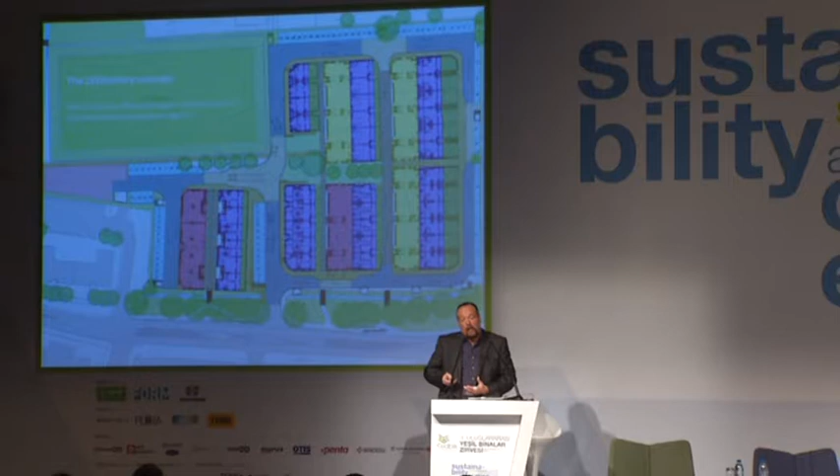We call this carbon trading in return for planning gain. So if it's possible to integrate low-carbon transportation, energy-efficient buildings, energy-efficient workplaces, and plug it into the existing city, you can get far more spectacular results than if you just concentrate on buildings or master planning alone. This is a view from the air of BedZed today.

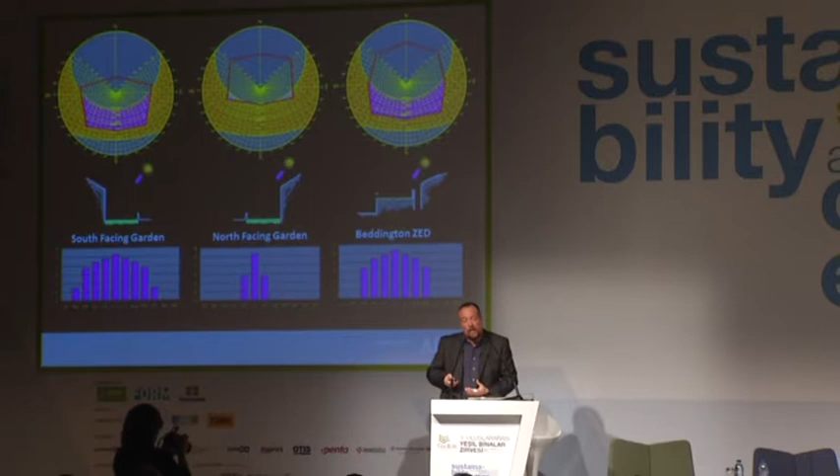These are just images showing what priorities we used in designing this new urban fabric. This is looking at sunlight falling on gardens, and the sky gardens at BedZed have more or less the same number of sun hours as a south-facing garden with a 2-metre high perimeter fence, which is the prevailing urban condition in the UK. Now this is important because if you can offer everybody a garden, people will want to live in this place, people will want to work in this place.

Why should you work in an office? Why wouldn't you rather work in a garden?

This is important because as climate change accelerates, it's going to be more and more important to have both indoor and outdoor living and working. So it's this relationship, this connection to the landscape.

We don't want to look through lots of layers of energy-efficient glass. We want to be part of and experience the wind in our faces, the sunlight coming in, fresh air, and above all, appreciate other life forms, plants, animals. So it's this connection with nature which is lost in a lot of green buildings, which hermetically seal the environment.

So at BedZed, we consider this as a landscape. It's an inhabited piece of landscape, not a piece of architecture, not a piece of urban design. Now that's what creates the added value—not necessarily the low carbon technology, not necessarily the super insulation, not necessarily the lower carbon footprint. It's the fact that you have a garden and you have sunlight coming into your home.

And there are lots of things that we can do better. There's lots of areas where it can be improved. This is relatively low-cost housing: 1/3 social rent, 1/3 shared ownership, 1/3 private for sale.

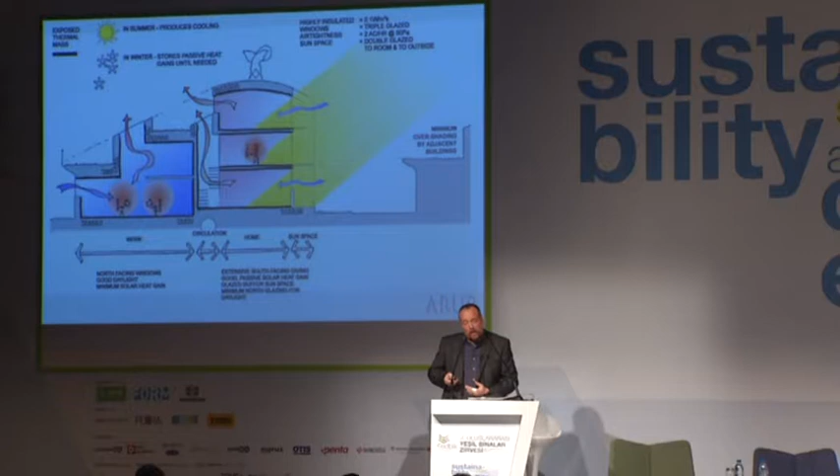Well, I know there's a lot of really good cave dwellings in Turkey. I don't know if there are very many cave offices, but perhaps there should be.

But the story about BedZed is people come to look at the technology—there really isn't any. And when we did fit technology, it broke down very quickly. So my advice is stay clear of it. It's one of the things where if you can minimize technology, you'll have the most resilient systems.

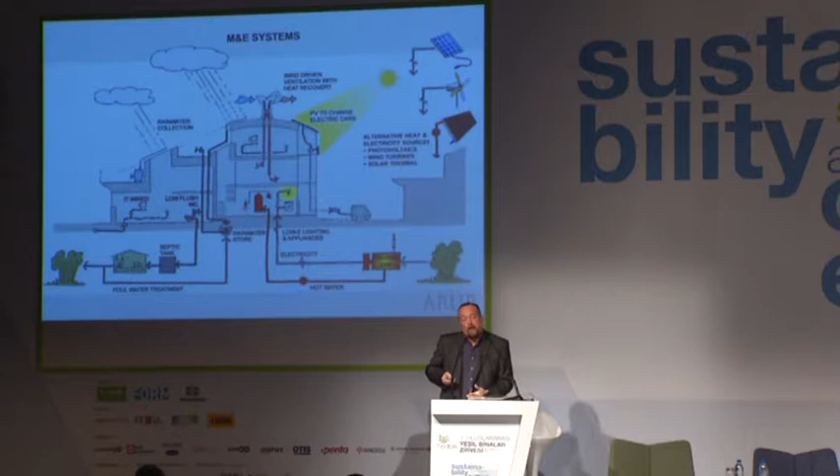Just about the only piece of technology worth talking about at BedZed is a biofueled combined heat and power plant, which ran very well for the first year and a half or two years of operation, and then completely broke, and we couldn't afford to replace it.

Even though today it's running on little, very small condensing gas boilers, it uses so little fossil fuel to run the development that it's still a great low carbon success.

But most important of all is the language and the fun, because green buildings have not been much fun to date. Can you capture the public's imagination?

We designed it so that shade zones to the north of the housing could be subdivided into very small units, encouraging micro businesses, or opened up to very large companies, perhaps employing 50 to 100 people and taking a whole terrace. So this idea of long life, loose fit.

And then the idea that gradually people would forget about the buildings, it would just become overgrown. We've raked back the elevations to make sure that sunlight, which gives very useful passive solar gain in the winter, is so effective that with the super insulation, you don't actually need a heating system in the houses, providing you cook yourself a meal.

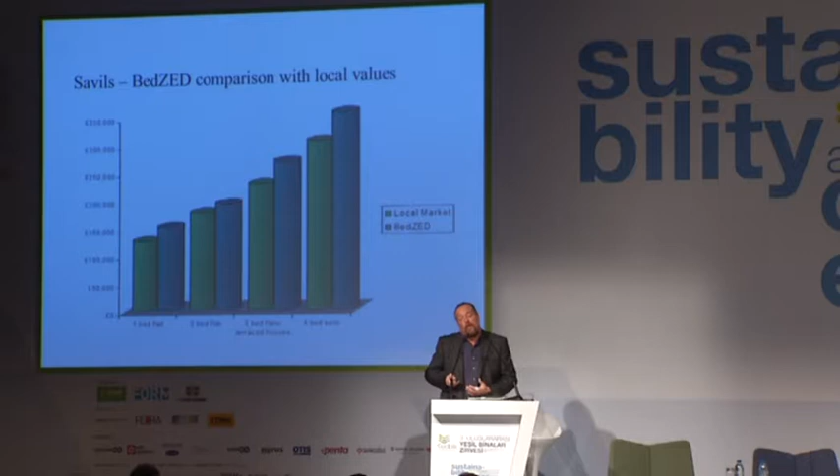And it can work financially. It's worked pretty well - on the private for-sale units, we've always achieved a 15% sales premium compared to the existing properties immediately over the fence. This has been demonstrated time after time. So 10, 12 years later, the project isn't perfect, but it really is starting to demonstrate that it's a relatively low risk to engage in these particular balance of technologies and urban morphology.

Then the next idea is how do we crank up and where do we go to really look at the future? How do we give the farmers a market? How do we resist urbanization? Why do we all need to live in cities? The answer is we don't. We need to give farmers more money. We need to give them a higher quality of life. We need to give them income.

So we've been designing the urban metabolism around what's called a zero fossil energy farm, where you produce food using renewable energy, organic food, you reclaim nutrients from urban and rural environments, you produce food without packaging, and you distribute food without using fossil fuels. These are big ideas, and we've been working hard on this for a period of years with farmers, and this has produced some of these technologies that we started when we did BedZED, which have really now matured. And this is what's interesting.

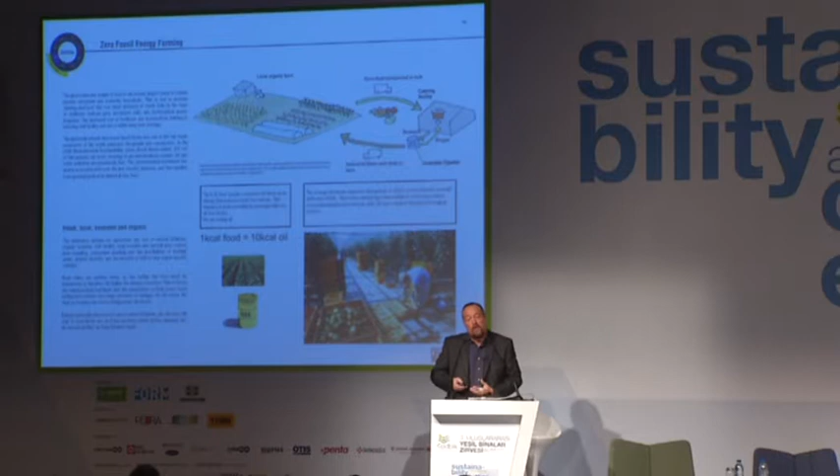So integrating farmland - one of the things we found at BedZED that really could work well was this idea of working with the surrounding farmland, using waste, agricultural waste, and perhaps using organic waste from the city without competing with food production. So the red on this diagram produces straw. This is urban waste. You do all your recycling as part of a zero waste urban system.

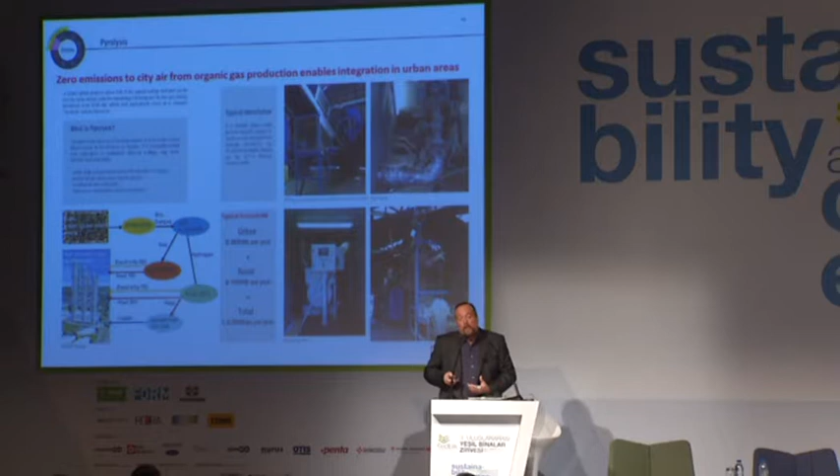And if you heat the organic material without oxygen, then you get very hydrogen-rich biomethane, which can then be cleaned and scrubbed and put into the city gas grid, and you can get large city centre projects paying for pyrolysis units out in surrounding farmland - we call this hydrogen farming. And this is interesting because the byproduct of this process is pure carbon, pure charcoal, and that can be sequestered, that can be buried as a soil fertilizer - biochar soil restoration.

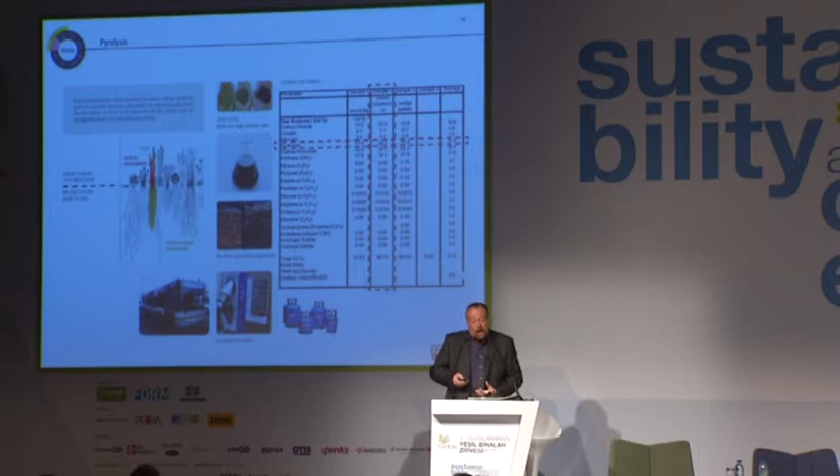And that takes about 20% of the carbon in the biomass out of the carbon cycle. So it's the only technology we know that actually starts to clean the sky, reduce overall atmospheric CO2 levels. And you can liquefy the gas and produce liquefied biogas, and you can then use that to run transportation systems as a replacement to LPG. So I'd like to see the taxis in Istanbul working on liquefied biogas within the next 5 years.

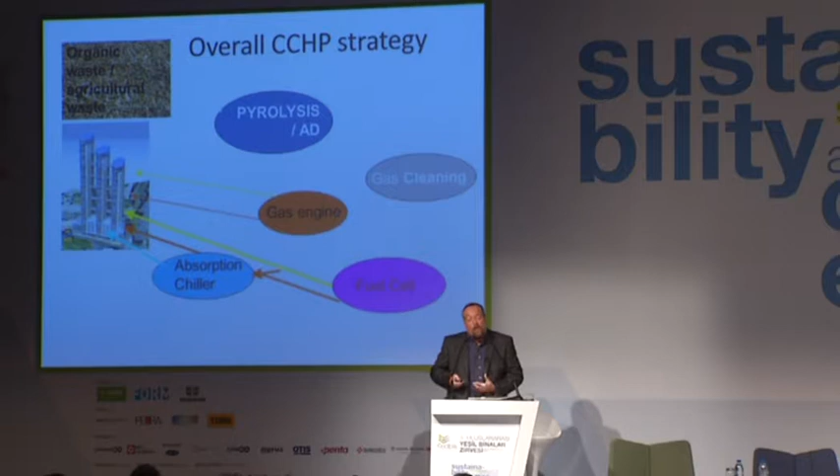So this idea of the city as a metabolism is also complemented by the idea of the ingredients of the city actually starting to microgenerate. And if you worked out that the farming system and the urban and organic material produced by a city could perhaps contribute about 40% of the overall energy needs in a fuel-efficient city, then 60% can easily be met by building-integrated renewable energy.

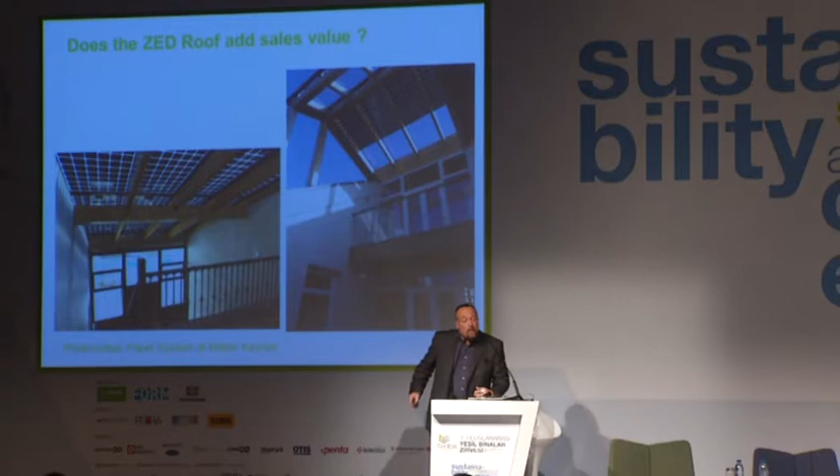And the thing that worked really well at BedZED was the photovoltaics. Nothing moves. They were built into glass, sealed into the building, and they just quietly get on with their job of generating electricity year after year. So we thought, well, people are making solar panels - how do you make solar panels more cost effective? You make it part of the roofing system so you don't have to buy a roof. And then you don't have to build solar farms because actually that's stupid.

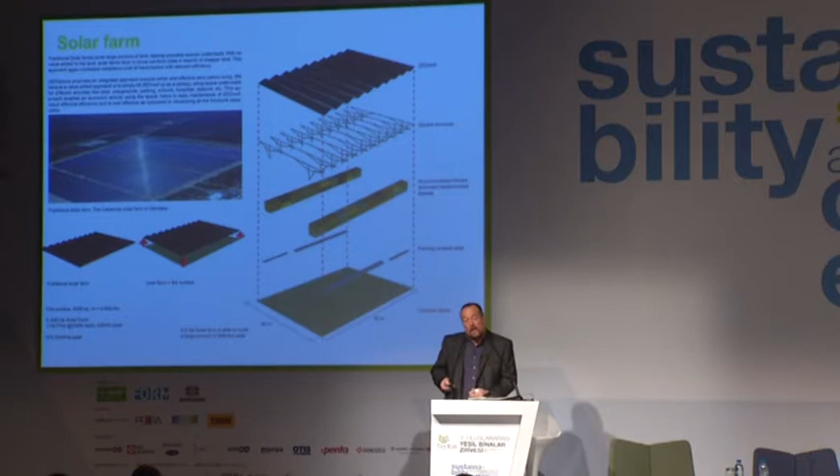You're losing valuable agricultural land. We're running out of natural capital as it is. Raise the solar farms up in the air and you can house them over your industrial estates or your roads or your parking areas or your markets.

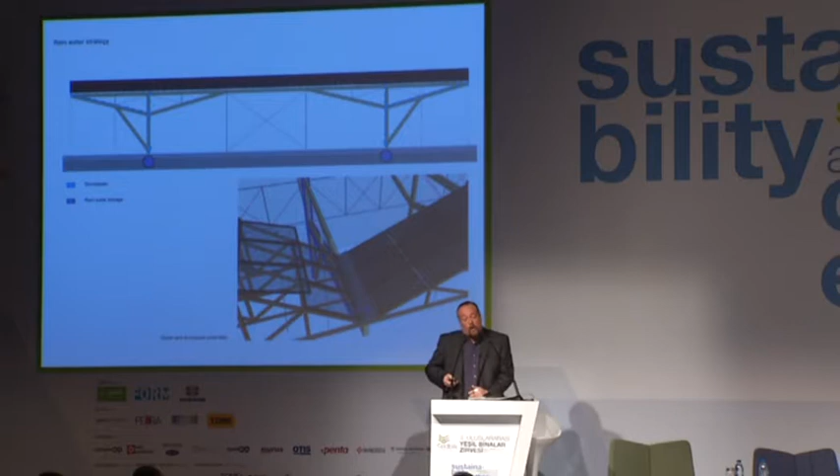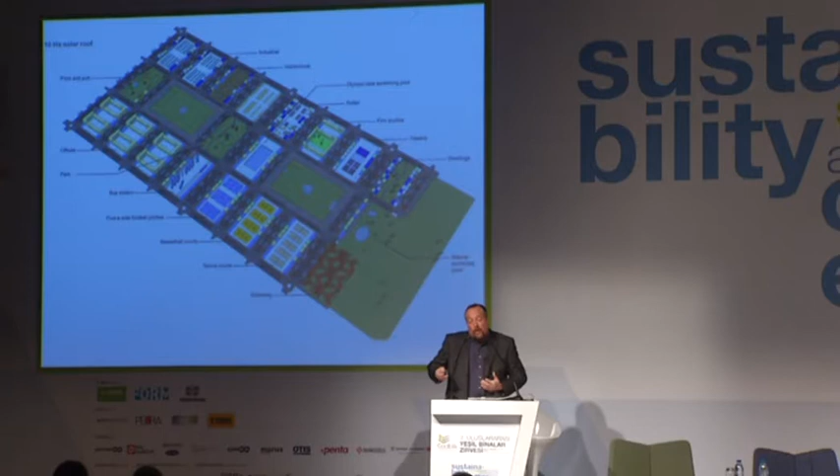You can then collect water, condensate from underside the solar panels. If you cleverly design them, you can collect rainwater from them. You can create covered markets, large-scale communal solar arrays. And that starts to set up the city of the future. That starts to set up the ingredients. And we're currently in production with these technologies at the moment.

And we're starting to get the first large community-scale solar markets being built, mainly in China at the moment. But some of those are coming to the UK.

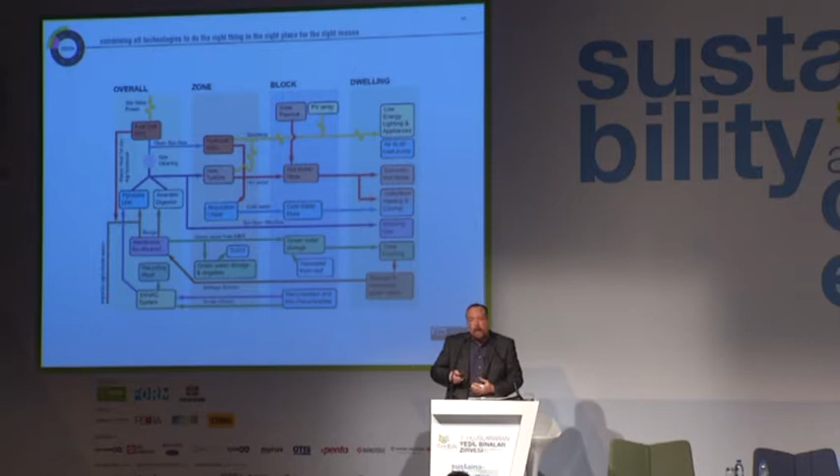So understanding what technology you use where is most important, because this is what people get wrong, what politicians get wrong, what green building councils get wrong. They get bogged down in whether the solar lobby says photovoltaics is the only solution, the solar thermal people say solar hot water is the only solution, the biomass people lobby for biomass, CHP or wood pellets, and so on. It's tedious. Actually, they're all required. Everybody has their place in this low carbon society. You just have to work out which technology is right in the right place.

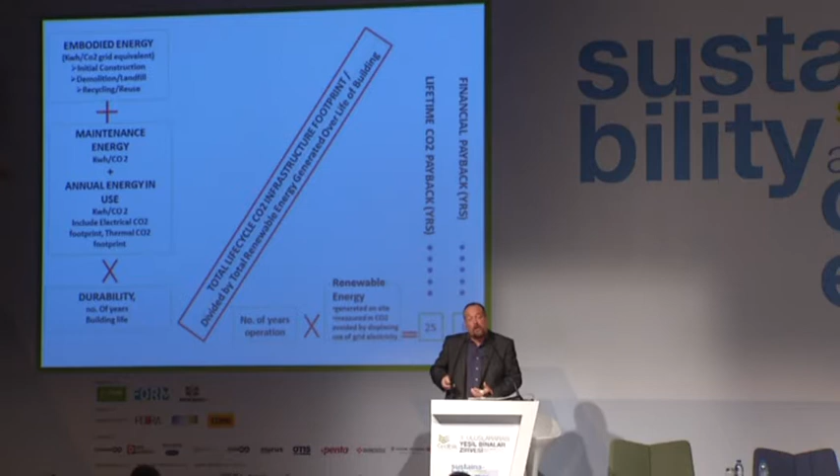And we've been working on a very simple mathematical formula which we think replaces a lot of the work done, particularly the LEED systems, which basically balances embodied carbon, the energy required to maintain a building, the actual energy used by the building, the durability, and the amount of renewable energy a building generates, divided by the energy invested in the construction of the building in the first place.

And we get a very simple equation: the number of years to carbon payback. This gives you one single figure. It's like distilling all of the green construction standards into one number, the number of years until carbon payback. Then you immediately have a fantastic bullshit detector. You can't cheat this. It's mathematics, it's building physics, it can be monitored, it can be checked. It's a great leveler.

It stops the industry wasting vast amounts of money. It's like a tax - you hire an expensive consultant to give you the cheapest way of achieving the maximum LEED score or the maximum BREEAM score, but you're not actually making any difference to global carbon footprint. You're not really helping very much.

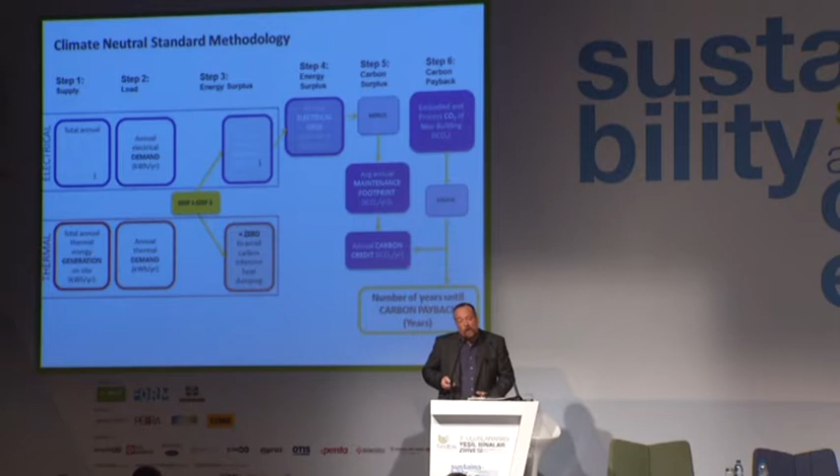So this is my plea: simplicity, honesty, and a very simple mathematical formula. And I'll be very happy to share that with anyone who's interested.

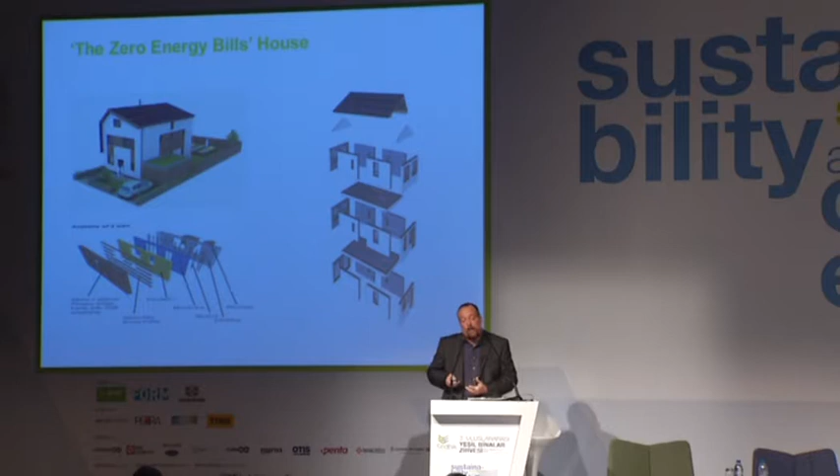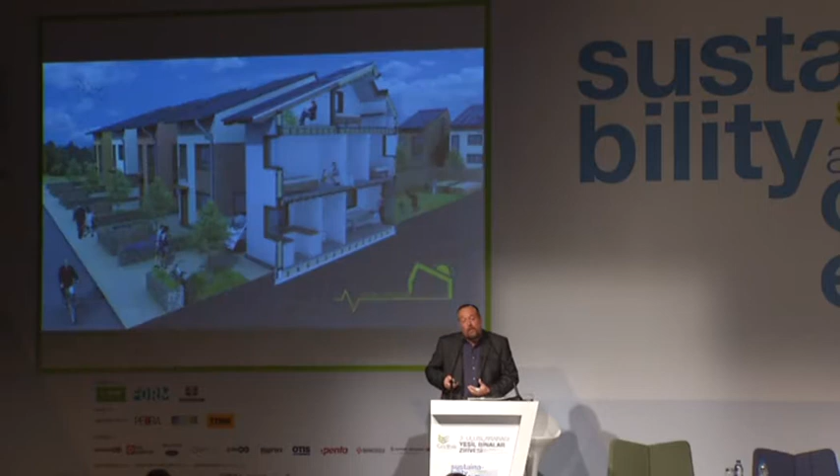And we've been working in the UK, trying to show how we can change our industry by introducing zero energy bill homes. By using roof integrated photovoltaics, we create a concept called the solar loft. If you design master plans with two-thirds of the roof surfaces facing south, you generate far more electricity than you can use in a year.

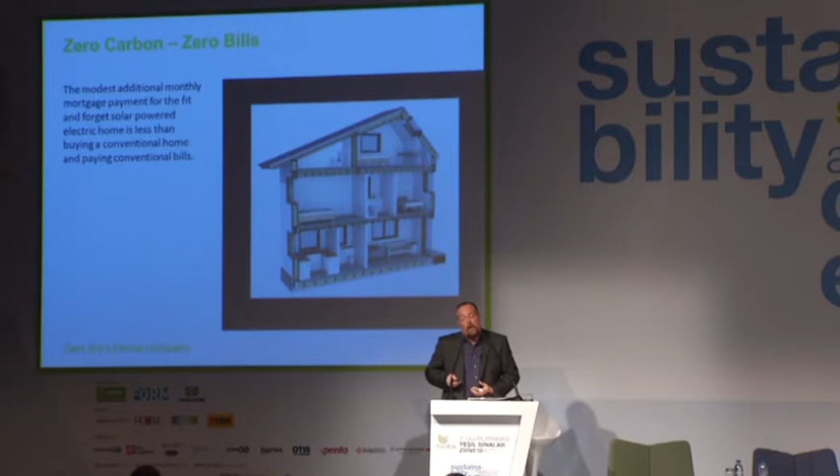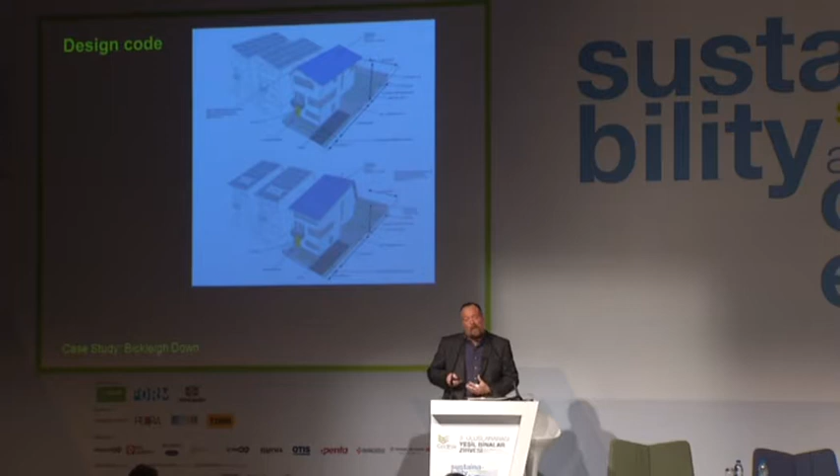With a modest feed-in tariff - the UK has one, Turkey has one - you find you're in about a 3 to 5 year payback on top of the cost of fitting an additional roof, so the payback is very short. If you develop standard house types with fixed costs and a design code which enables large master plans to accept different housing typologies, you can launch that to the consumer.

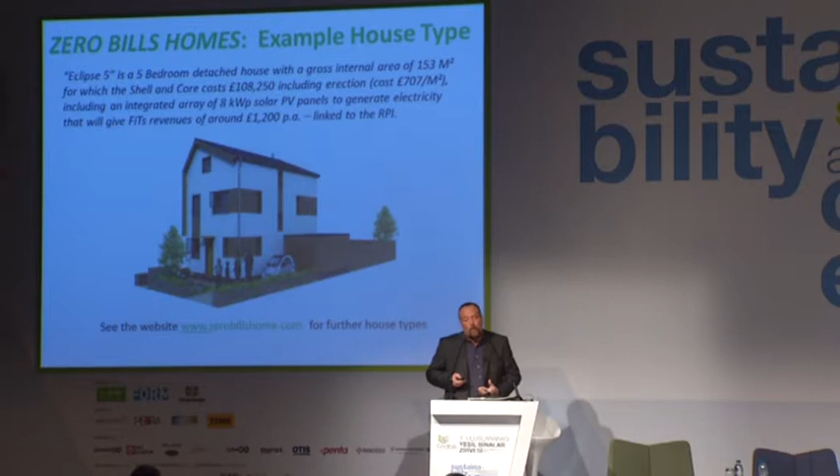And that's the big experiment we're doing this year. We're really showing the government and existing house builders how they could move to this step change reduction. These are energy positive homes - they generate far more electricity than they use over a year. And we're able to sell these directly to the general public by working with landowners and selling plots with kits.

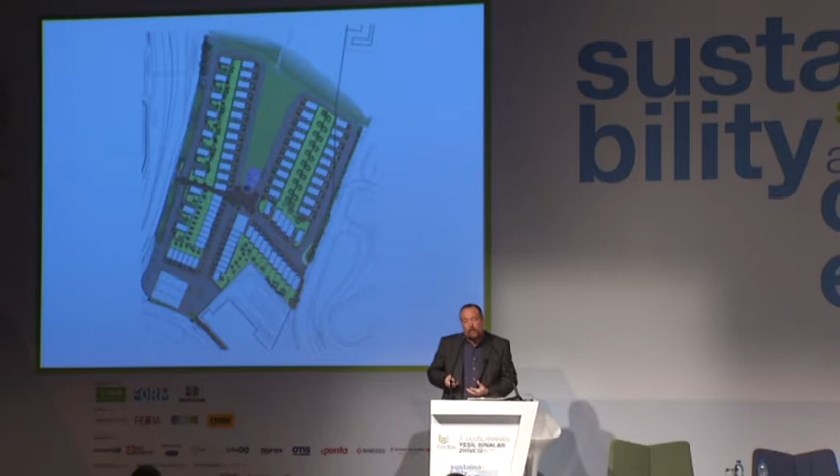There's a whole range of self-build mortgages, so you work with a self-build mortgage provider, and that produces this kind of community. I appreciate it may be low density for Turkey, but 70% of the homes in the UK are built at 50 homes per hectare or under.

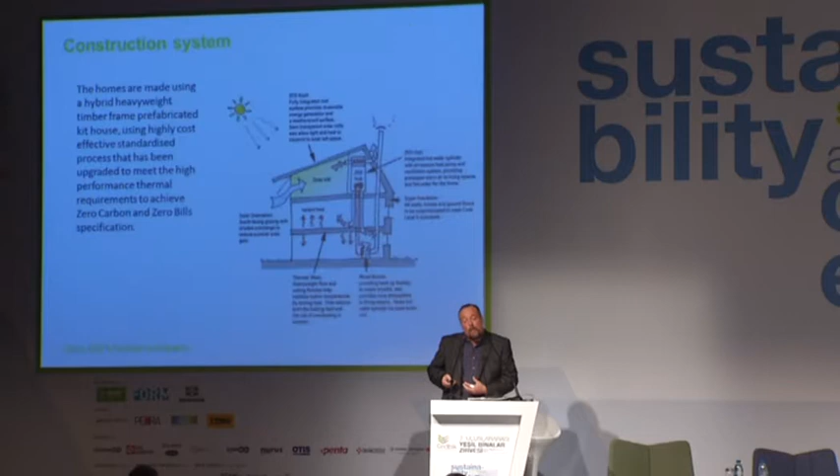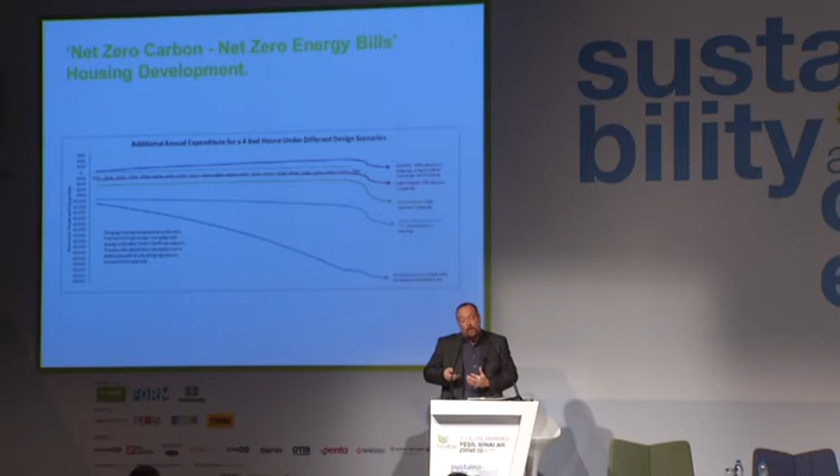So this is what we're doing at the moment, and we're finding the public is really interested in this concept, because the typical energy bill in a UK home is around £1,500 a year. If you're able to offer them no net energy bills at all, that's a £1,500 saving, and they can clearly see that over the life of a building, this will make a very big difference to the family economy, or indeed the economy of a business.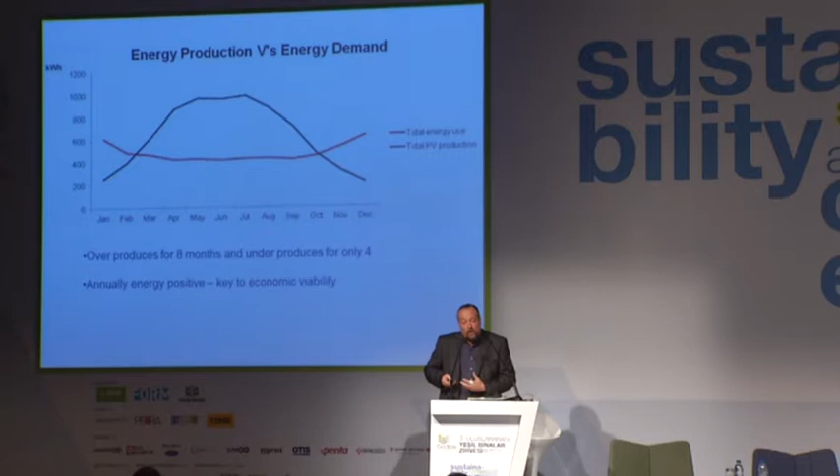So this is a graph showing energy production versus demand. Red is the demand, black is the production, and you can start to see how the overproduction in the summer and importing of energy in the winter fits very well into a smart grid system. But overall, the cash flow is very positive.

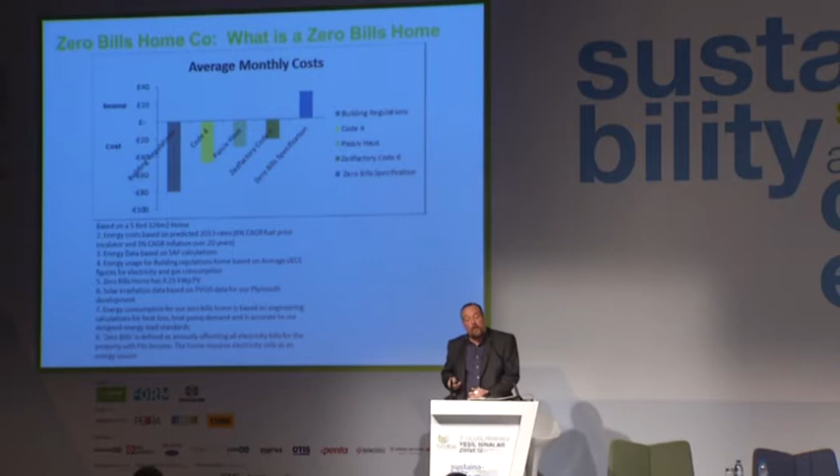So instead of apologising for the additional cost of low-carbon buildings, actually, we're selling it to the public because they'd be really stupid if they didn't buy one. They're locking themselves into a very precarious future with an annual fuel price escalator in the UK of somewhere between 8 and 10% a year for the next 5 or 6 years.

Then we start to create jobs, employment, green jobs, creating these kind of homes. We start to go into mass production, working with industry, incorporating thermal mass into dry construction techniques for passive cooling, looking at advanced computer-controlled milling operations, reducing the embodied carbon of foundations using GGBS-driven mini-piles, and raising the buildings up so that they can cope with flooding.

I nearly didn't come to this event because my home was very nearly flooded.

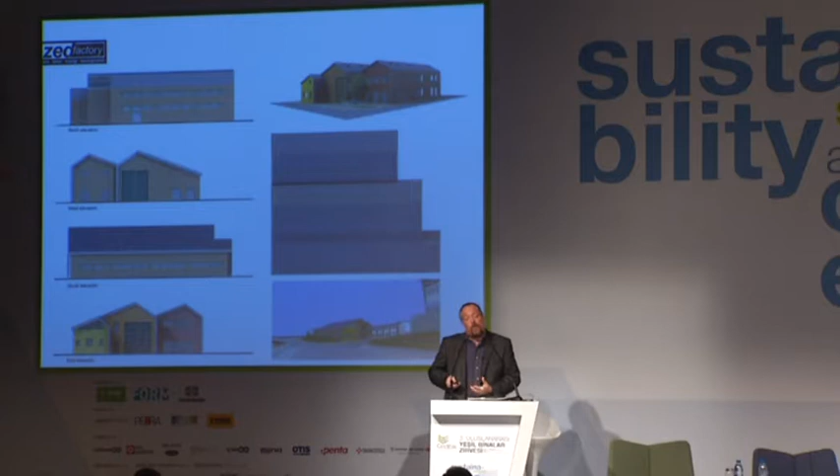And that produces villages like this. It produces villages and workshops with factories and jobs, and you start to get a virtuous circle where the community can understand how moving across to a low-carbon economy actually creates a more attractive future. And then you can scale up these concepts.

So we're looking at how we can do living, working communities to replace the Chinese preference for very high-rise buildings with very low overall density levels, because they surround them by roads and underused parks.

So I wanted to show how some of these ideas join together, and if you involve behavioural change, you can get spectacular results.

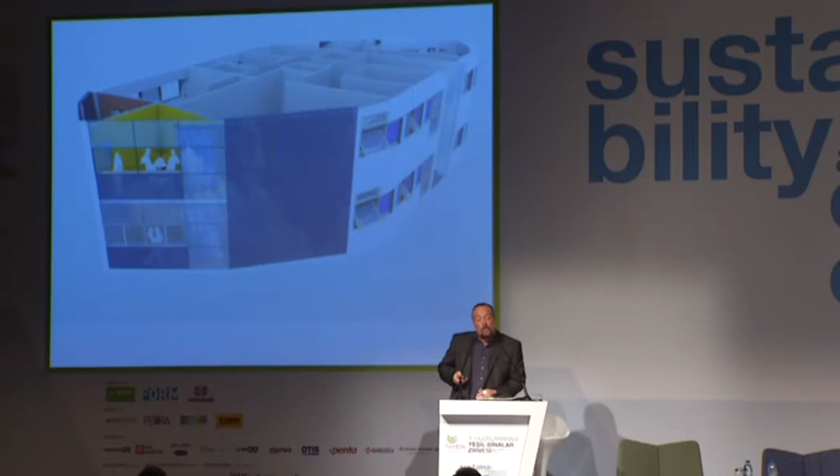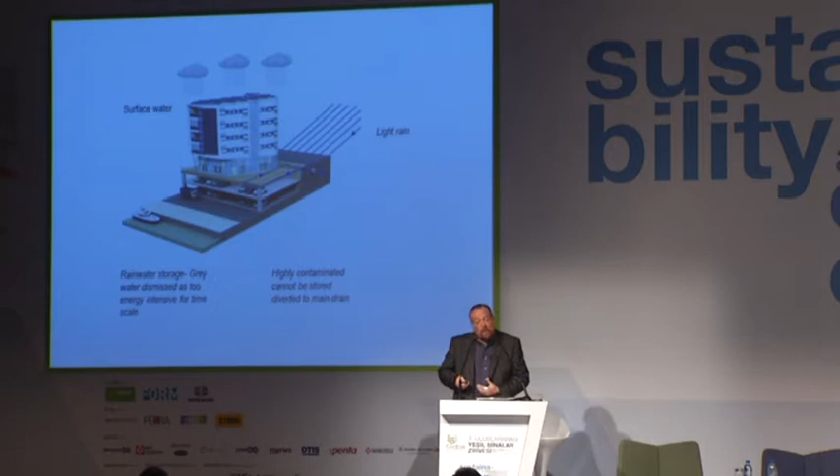It has an undercroft with all the sort of normal urban active frontage, cafes, all the lifestyle things that integrate a building within the city successfully. But we're also starting to look now at climate change adaptation, starting to look at flooding, surface water, and how the building blocks could change to store rainwater better.

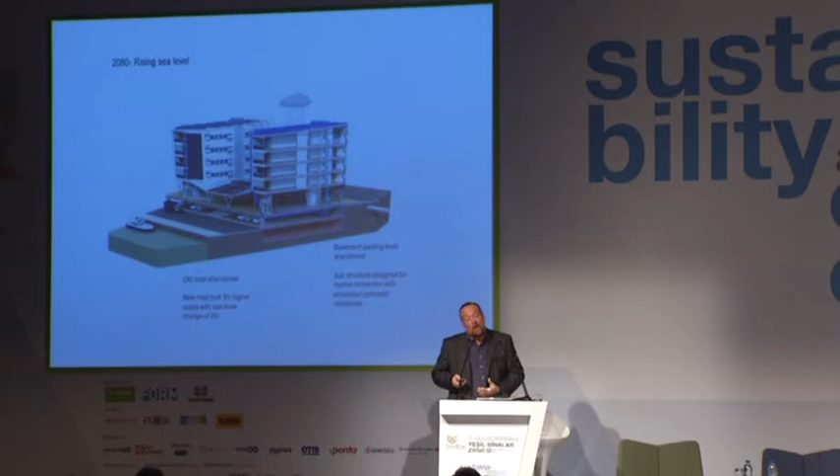How would it change with rising sea levels? Because there's going to be quite a policy of planned abandonment on the UK coastline. And so we designed a parking undercroft which could be abandoned over the lifetime of the building. So probably by 2080, very substantial changes would start to occur.

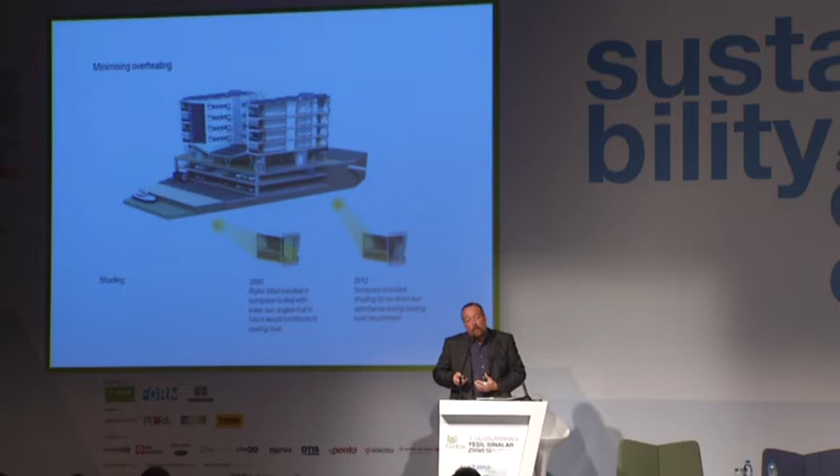And this is all happening very fast, minimizing overheating. As we're failing on climate change mitigation, climate change adaptation becomes absolutely critical, and that's very much the mood in the UK at the moment.

The country has been very battered by the weather recently. We've been on flood alerts since Christmas Eve. So this idea about not necessarily building, but designing inhabited landscape, I think is helpful to the green building scene.

I wanted to quickly show two last ideas. One is that as the wars grow stronger, as there are more and more refugees, as Turkey has problems with resettlement of refugees from Syria, we've been looking at how to do zero bills or zero carbon communities with people who have very little. And almost the less people have, it almost becomes easier.

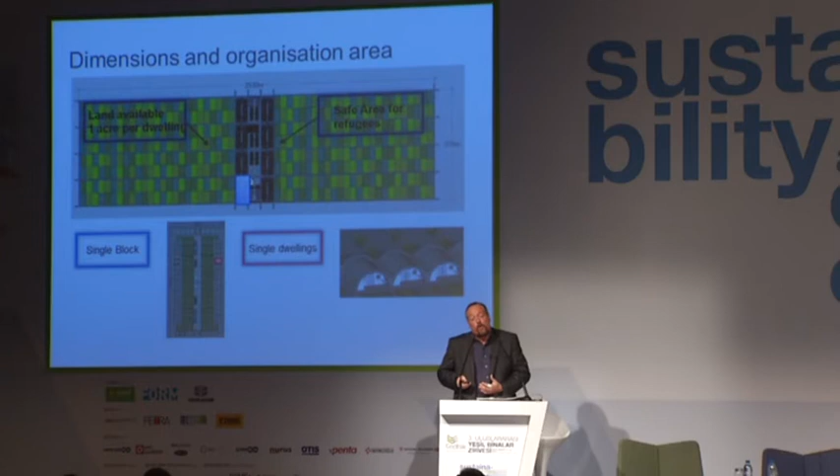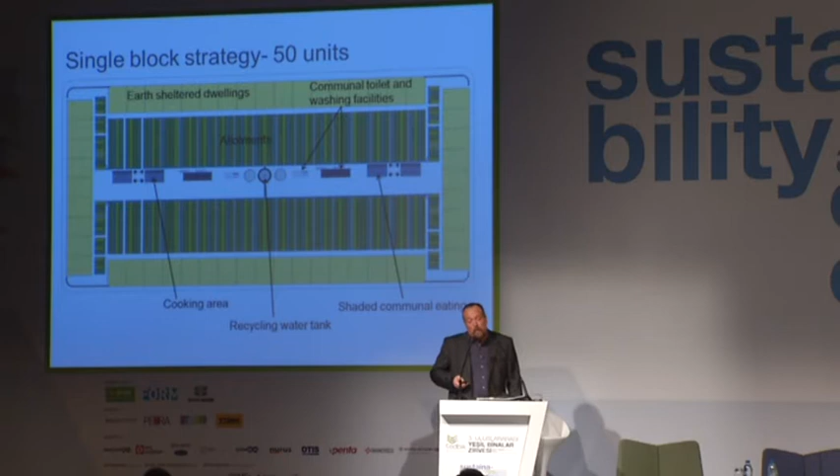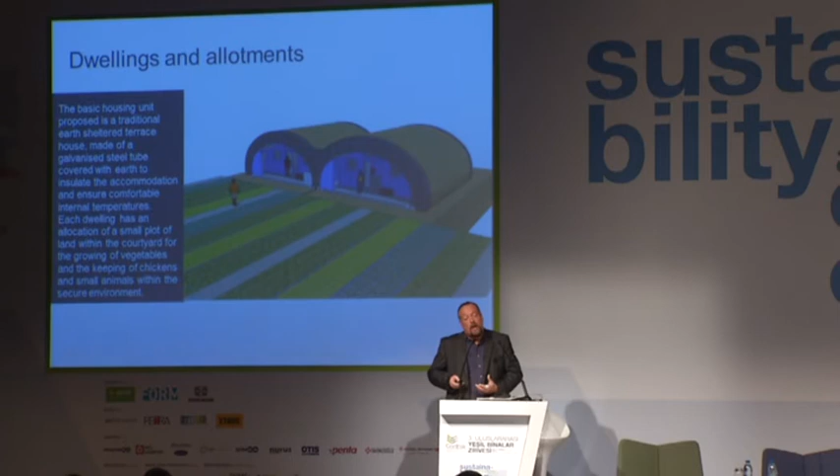The accusation that we can't afford to change and introduce these ideas into new settlements is ridiculous, because we're doing it in Africa on budgets of 1,500 euros per bed space. That's possible, it's not even a fantastic challenge, although some of the space standards and internal finishes would have to be changed for a more affluent society such as Turkey. But when you have nothing and no infrastructure, it really makes sense, and you can create these kinds of environments that work well.

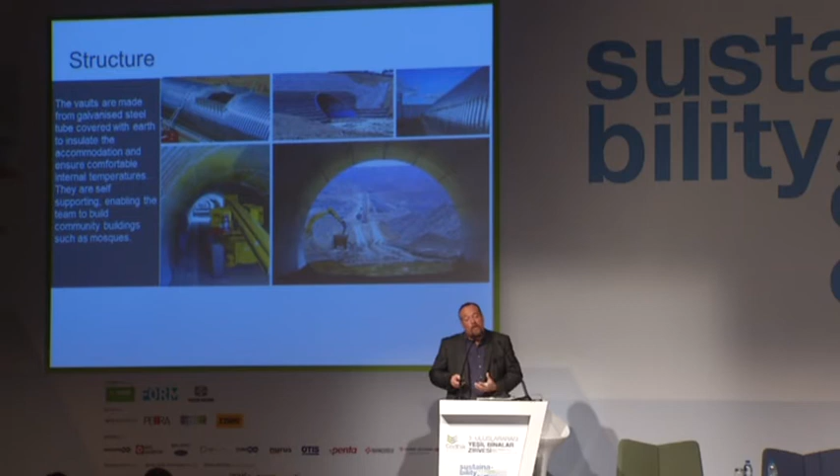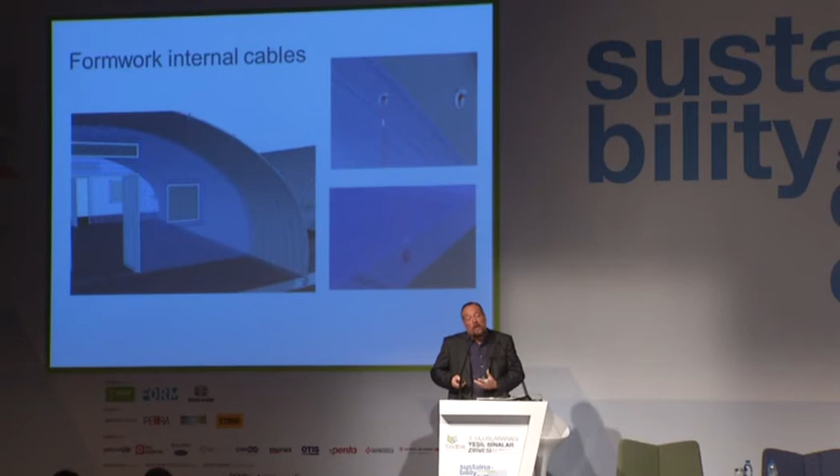You can create earth shelter structures that dramatically reduce the need for air conditioning. You can use local labour to build them, and you can go a lot further than traditional aid organisations will tell you. It only costs 3 tents' worth to provide permanent cities for the future, which can take densification and expansion.

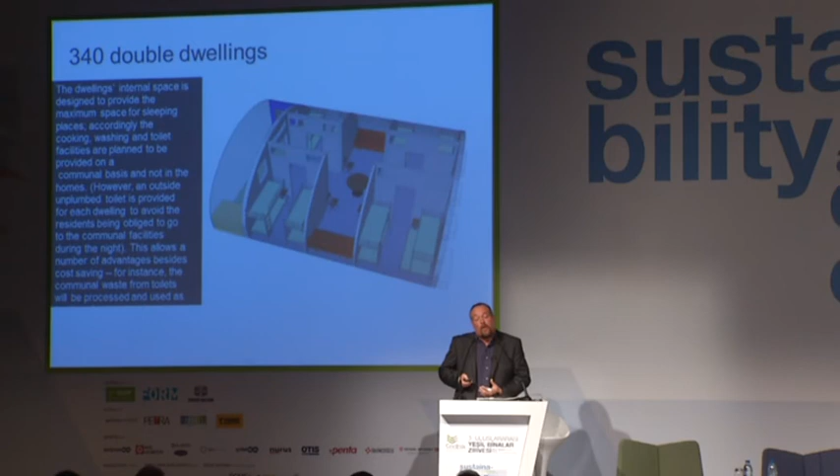What this has been teaching us is that if you think through these challenges and start to plan how you provide water and sanitation, if you think through security, because at the moment many of these places have people on pickup trucks running through with machine guns, terrorizing the community, if you think through all these things, it is possible to provide a workable future.

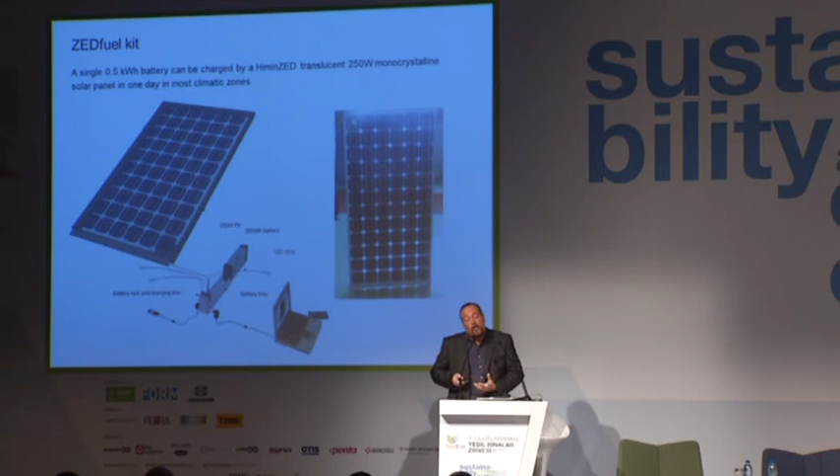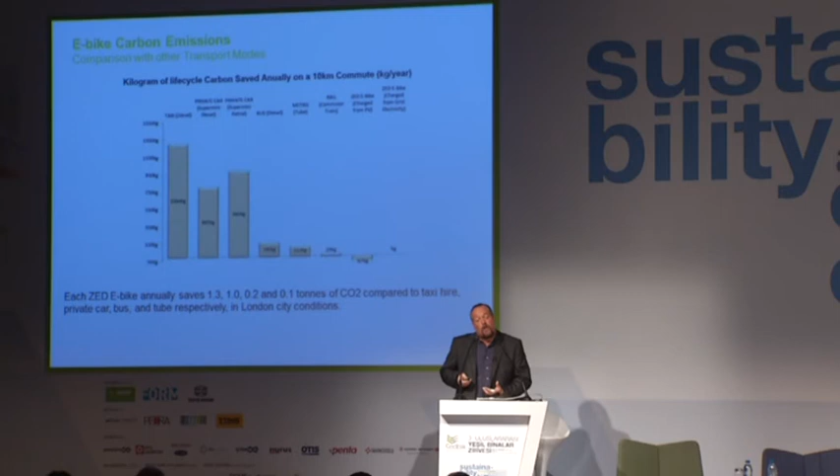What we found was that there was no chance of power stations, no fossil fuels often available. We had to power everything from one simple technology, a solar marketplace, communal solar array. We've been charging small portable batteries for each home, which can be charged from solar, but also run LED lighting strips and electric personal transportation systems. The savings on carbon footprint from integrating personal electric transportation is spectacular.

We've been trying these ideas now for more than 20 years. We built our house 20 years ago. My long-suffering wife, Sue, and I have really tried to show that these ideas are starting to be workable.

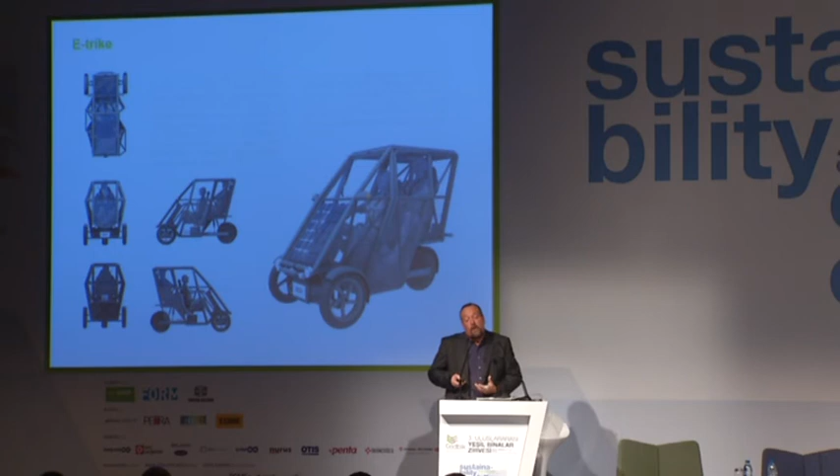If you say in Istanbul today there is just traffic everywhere, there's quite a lot of air pollution from fossil fuels, this is the kind of future you could be looking forward to. Very low-cost electric vehicles, perhaps made by local workshops, where all the technology is perhaps only in the wheels and the electronics. And perhaps covered markets, and perhaps...

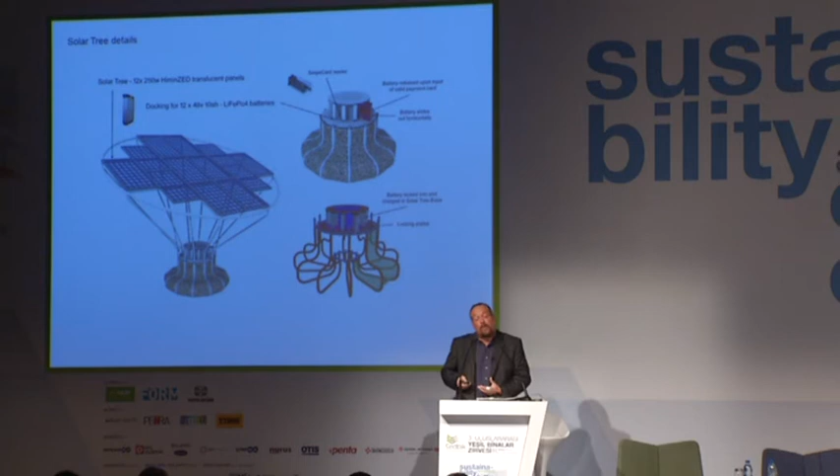All the large areas of tarmac and flat roofs can be converted to these kinds of solar power stations. What we're finding is this really works, far cheaper than engaging in the expensive infrastructure of fossil fuel power stations and distribution.

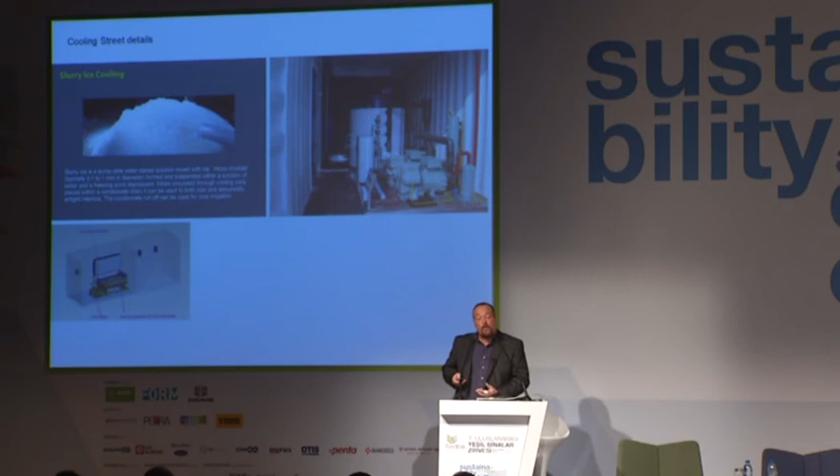We're marketing this as something called a Z Street, where you use the street to provide water, water treatment, water supply, and cooling. We've got ice cooling systems powered by solar energy, in shipping containers which can be integrated within the architecture or turned into the streetscape. These things make so much more sense than relying on conventional utilities.

Finally, I've gone on too long, but we're renovating existing buildings, applying all these technologies now to an existing building in Holland, working with the WWF One Planet Business Garden team in Amersfoort. I want to show how pretty well everything can be used to turn a very bad existing building into a really fun low carbon or zero carbon demonstration project.

This is an example of understanding the carbon implications of every single design decision, measuring it, and then making sure that you integrate enough renewable energy systems to actually power the new use.

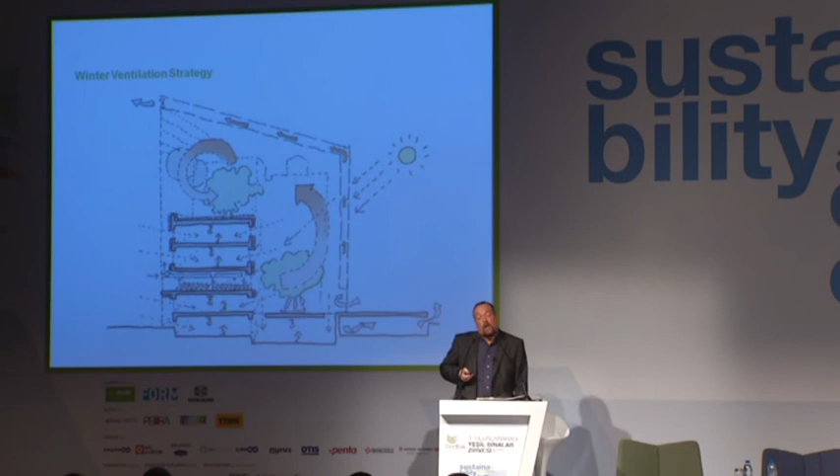So we put a climate shell made from the photovoltaic roofing system over the whole building. We then made all the horizontal roof surfaces into gardens, connected them up with ramps, stairs, and walkways, and you get this. You suddenly get a very dull tax collector's office building turned into a garden. So it's a business garden - you work in a garden.

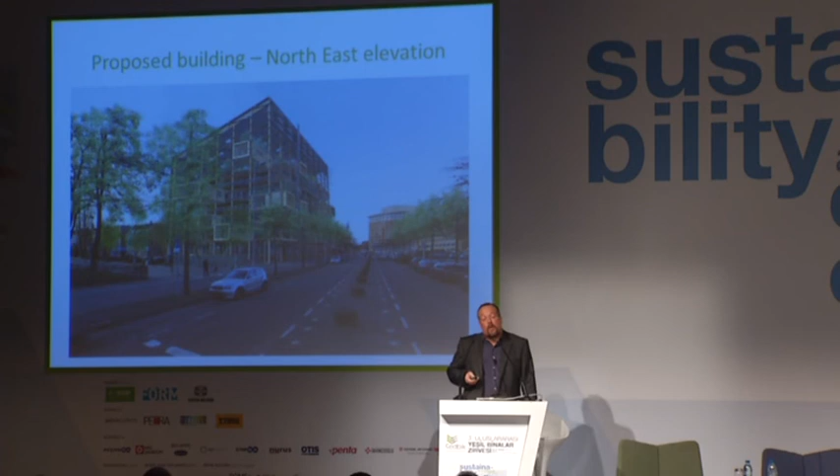I think this is the future. We don't have to knock buildings down. We can convert what we have, but urban design and cityscape will change.

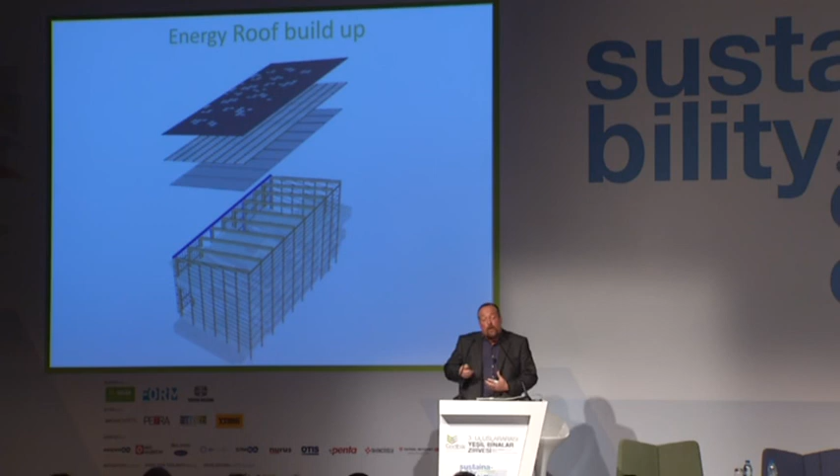I think that's my main lesson really: if we can do this now, because we've got the economies of scale, the industrial design of the individual components, the prices have dropped enough, it now becomes more economic to do this than to refurbish using conventional passive house techniques and build power stations to serve it. This combination of passive energy efficiency, renewable energy, and imaginative architecture is the way that we'll power ourselves into this new future.